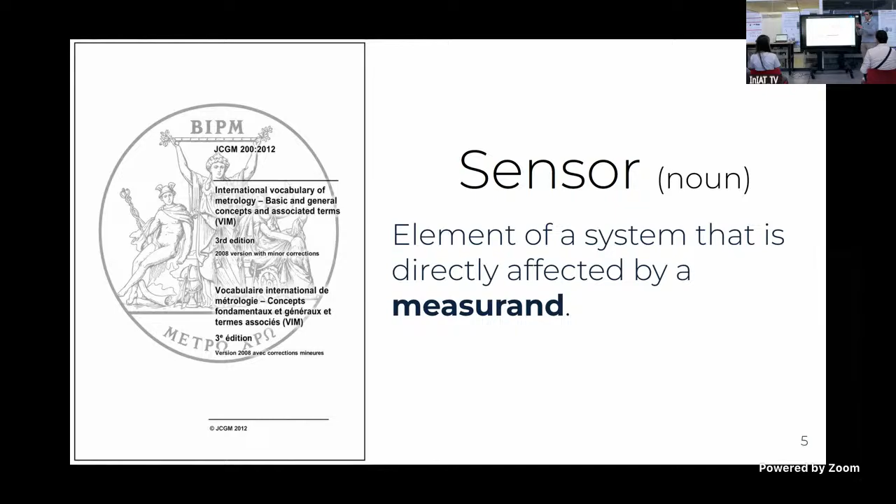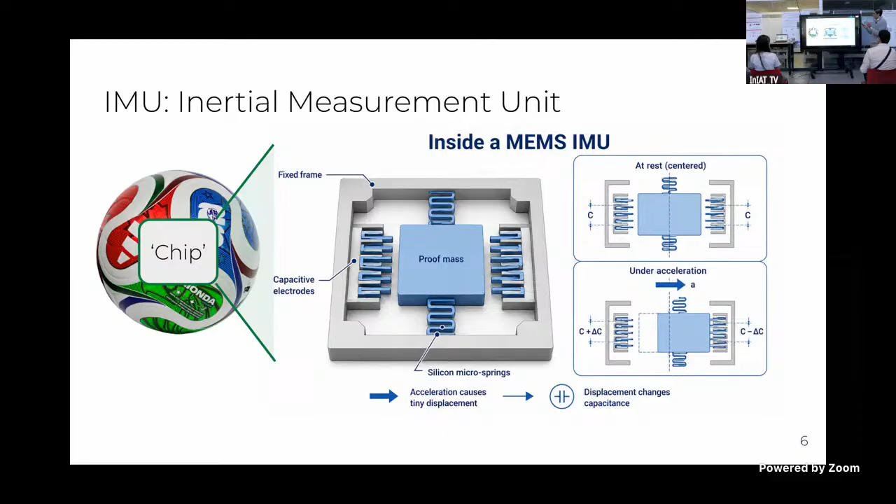In this case, the chip or CPU that the sources say the ball has is actually an IMU. I'm pretty sure people here at InIAT are experts in IMUs. This specific type, the micro-electromechanical system IMU, consists of a fixed frame with a movable proof mass in the middle. As the mass moves to one of the sides or walls of the frame, the capacitance increases or decreases, and from this change in capacitance, we can get acceleration. This is only 3 degrees of freedom of the IMU that account for linear acceleration. We know the IMU actually has 9 degrees of freedom, but for this example we only need these 3.

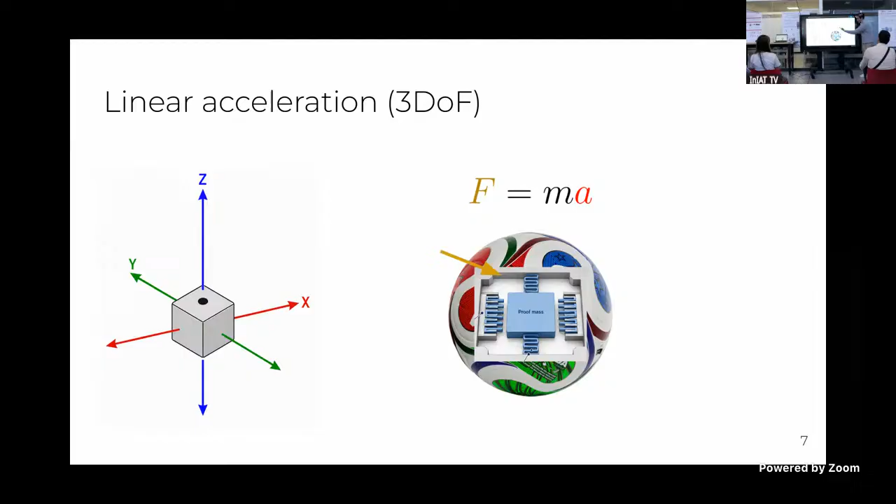The working principle, really the basics, is Newton's second law, which says force equals mass times acceleration. Given that any pressure or force applied to the ball comes with acceleration, we can get the force applied to it, no matter where we applied it. This presentation is not actually about football, it was just to get us started.

The next thing I'll discuss is sensors beyond the soccer field. Specifically, we want to discuss sensors that allow us to get information between the stump or residual limb and the socket, the cup that the leg prosthesis comes with. Then I'll share a timeline from very archaic but yet resourceful methods to get pressure back in the day, to e-textiles, which is one of the leading fields in sensing for pressure. Later on, we'll talk about the e-textiles we've developed at the Wearable Robotics Laboratory.

I'll guide you through what can go wrong because there's no perfect sensor. And I have some bonus for you guys.

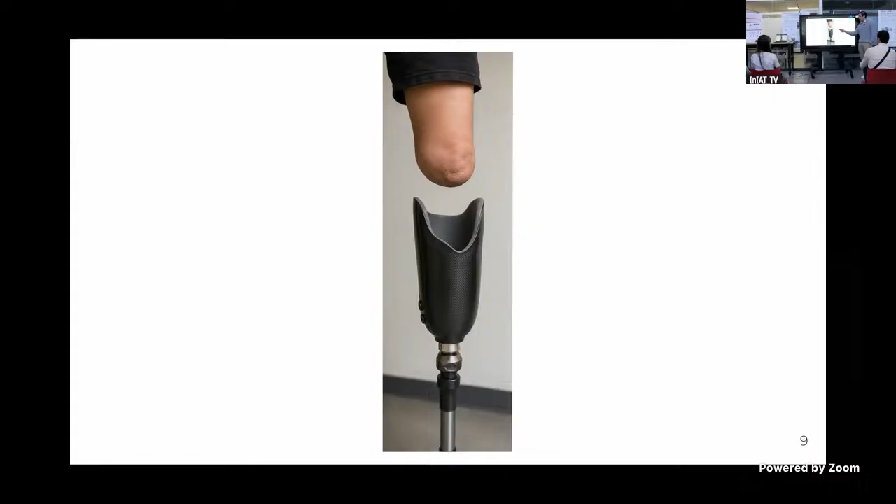To get soccer outside of this presentation, sensors allow us to get hidden information because you can't really tell when a player is touching the ball at a specific time frame. So in my research, sensors help us to see hidden information on the subject.

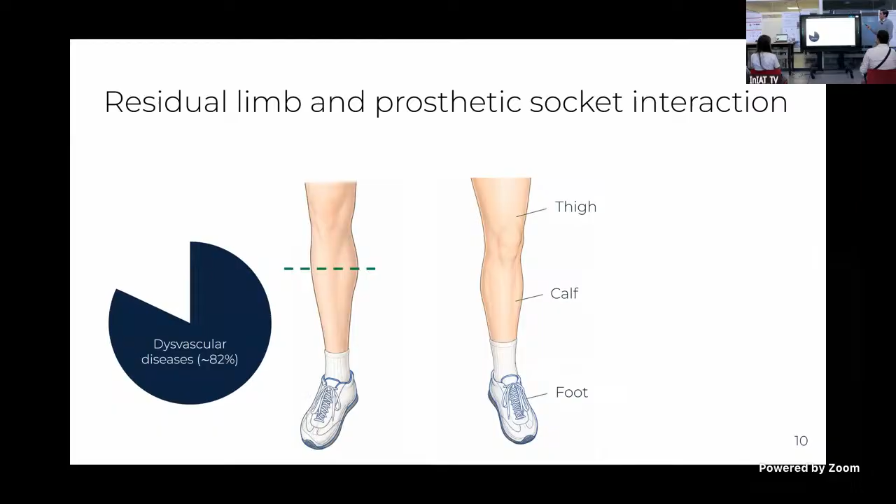Just to give you some context, why would someone get an amputation? There's a couple of reasons that encompass the scenario. The number one reason why someone would get their limbs amputated is diabetes or dysvascular disease. This starts with the accumulation of fat on our veins, and that makes blood flow difficult, not allowing blood to travel to your extremities, which is problematic. You would eventually get one of your limbs amputated for this reason. This accounts for around 82% of the cases.

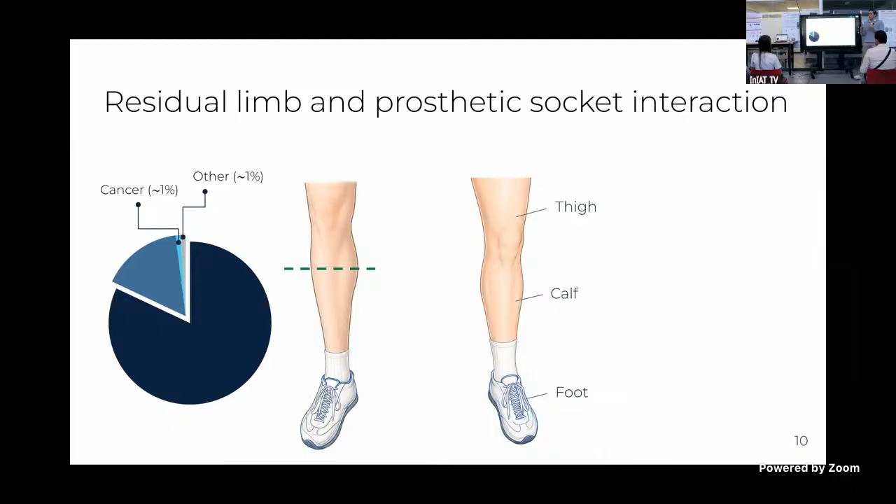Then we have trauma, and that means it could be an accident, or over the war, a bomb. Then the not so common causes, but causes for amputation are cancer, accounting for 1%, and other, accounting for also 1%. So once a subject has an amputation, they are usually prescribed a prosthesis to regain support, so that they can become independent again.

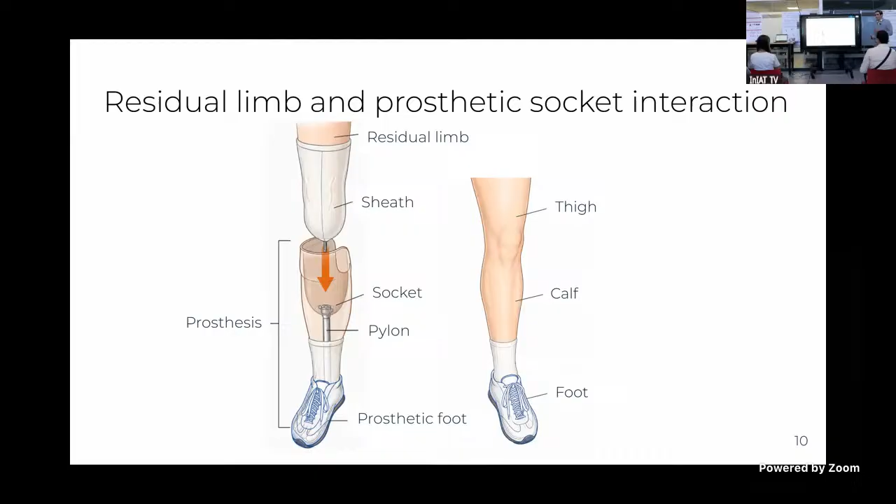A common prosthesis is formed by the socket, which is what is in contact with the residual limb, the pylon connecting the socket and the prosthetic foot. There are other types, more fancy, that include actuators and whatnot, but this is enough for what we need for this presentation.

Now, the issue comes with the fact that the residual limb is not constant in its volume, and through changes in volume, we can also get problems in the interface because the socket remains its shape and volume fixed.

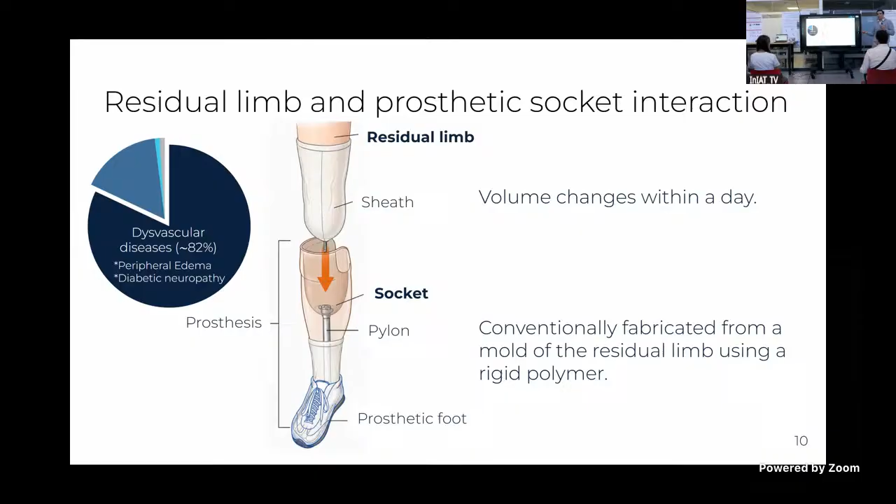And just so that we remember, 82% of cases are due to diabetes, and diabetes comes with edema, which means growth and shrink of volume, and also diabetic neuropathy, meaning that the user loses sensation. If someone is not able to tell when it's comfortable or not, they can't really communicate to their prosthetist or the specialist. And that's why we need sensors in this field. As the saying goes, you can't manage what you don't measure.

So I know for a fact that some people know German here. The first paper that I found on this topic is 'Die Messung der Druckverteilung im Schaft von Prothesen,' or in regular English, why bother? Measuring the pressure distribution in the socket of prosthesis, as simple as that. Back to 1954.

Researchers thought on, well, first of all, in this year, people still wore wooden prosthesis, meaning prosthesis made out of wood. So this was actually innovative. They drilled 100 holes around the prosthetic socket, and then connected a tube that would apply a known pressure, which they would measure using two manometers: one to control big changes in pressure, and a more fine manometer that would control small changes.

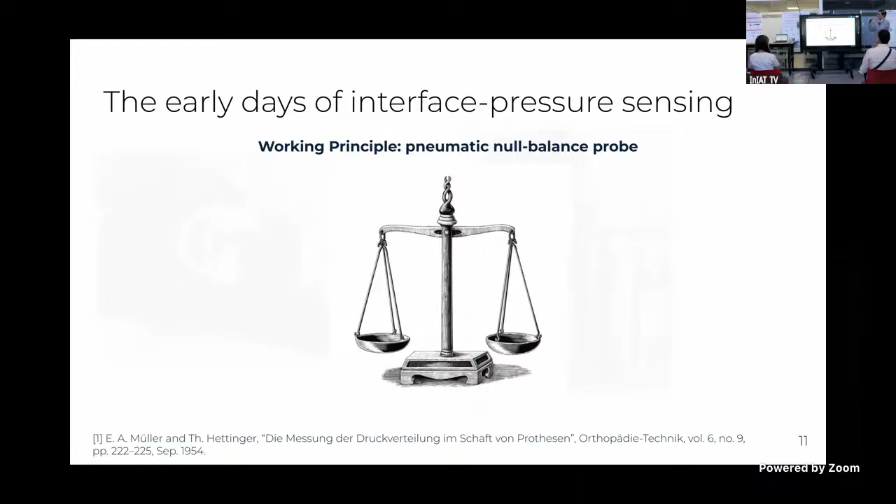Their idea behind this was that if you have one of the null-balance probes and you want to figure out the mass of an object, you could place that object on one side and then place a known mass on the other side. If they reach equilibrium or balance, then that value is the value of the mass of the first object.

Going back to pressure, this means that if you're applying some known pressure on one of the holes and suddenly the limb lifts—which obviously is not going to happen because they weren't accounting for the anisotropic behavior of skin, meaning that if you apply pressure in one direction, it deforms in one direction, but completely differently in a different direction—so the limb was never going to lift, but that's what they thought would happen.

When the pressure applied was less than the pressure felt at the interface between the residual limb and the socket, the limb would remain seated, but when they were kind of similar, the limb would lift a bit.

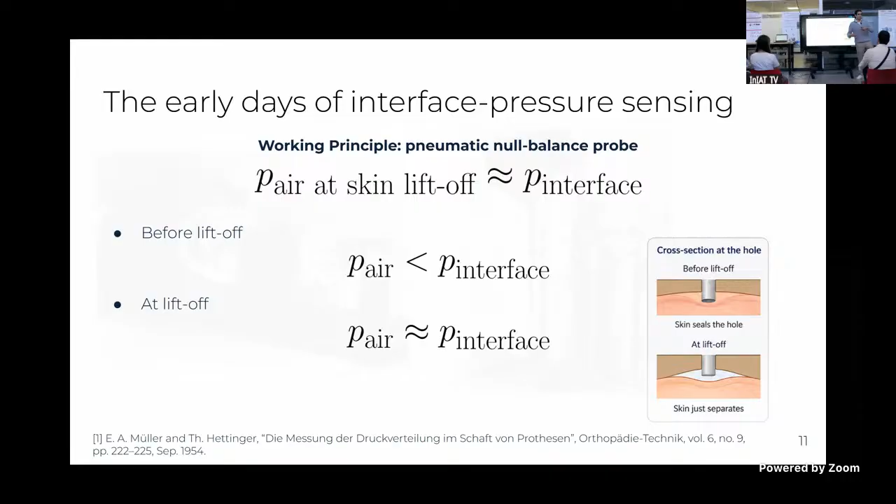Yet they found some really meaningful contributions to the field. For example, it's very different to have continuous pressures for a long time as opposed to intermittent pressures. You can also increase the pressure a lot if it's only for a small period of time. However, too much could be harmful for

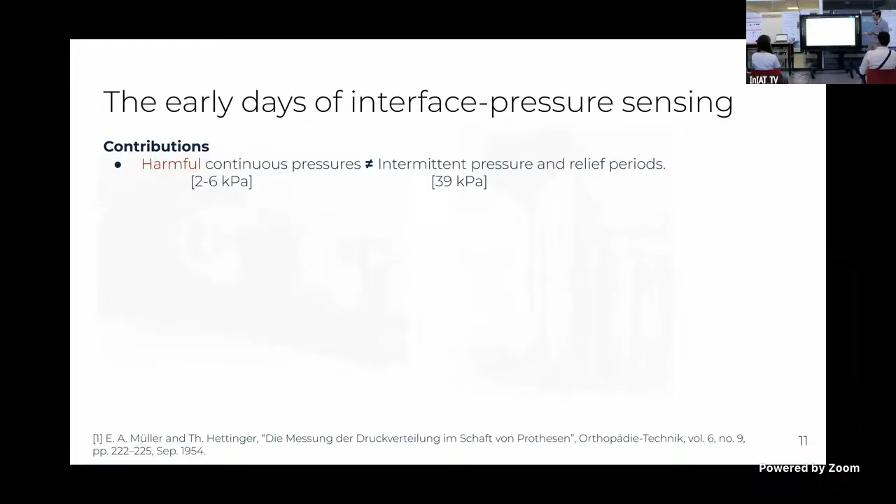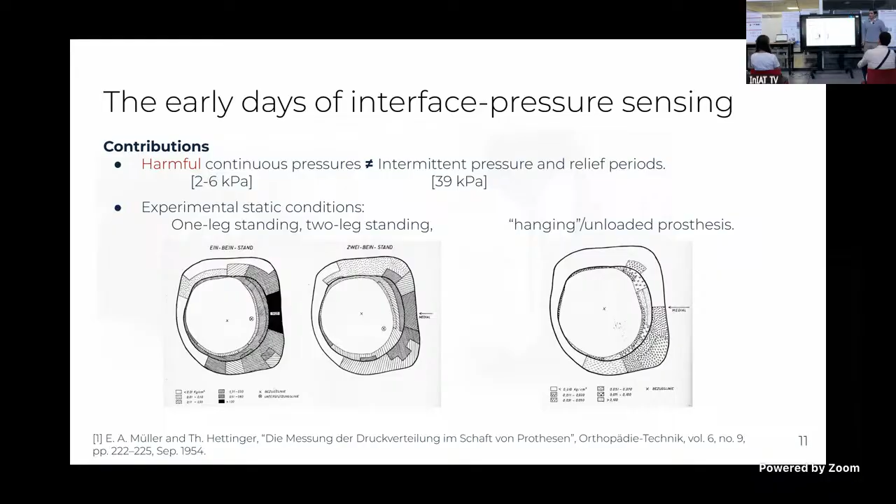a residual limb. Also, although this was not numerically accurate, the values here were not accurate, they knew that the pressure was different if the person was standing on one leg, the prosthetic leg, or if they were standing on two legs, or if they were lifting their body with bars. So that's also meaningful.

However, the main limitations were that these experiments took almost an hour or more because of all of the changes. They only had 2 probes again, and they needed to change those along all of the 100 holes. And there was the lift-off error, as I mentioned earlier.

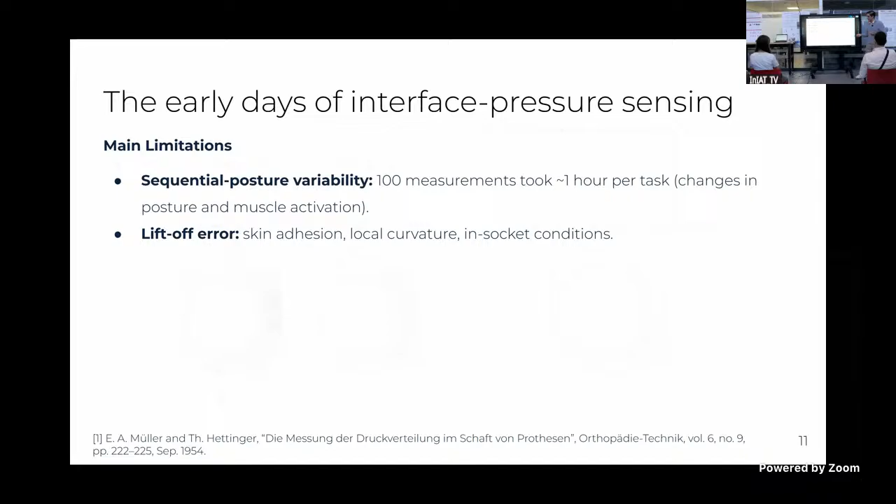Pardon me again for the language. What this table means is that they're comparing standing on one leg versus standing on 2 legs. They first measured the mass of the subject, that's here, and then they try to estimate the mass of the subject by adding up the pressures of all of the 100 holes. And the difference was considerable or not, depends on your opinion. I believe it was a good result in the end of the day, given the year when it was executed.

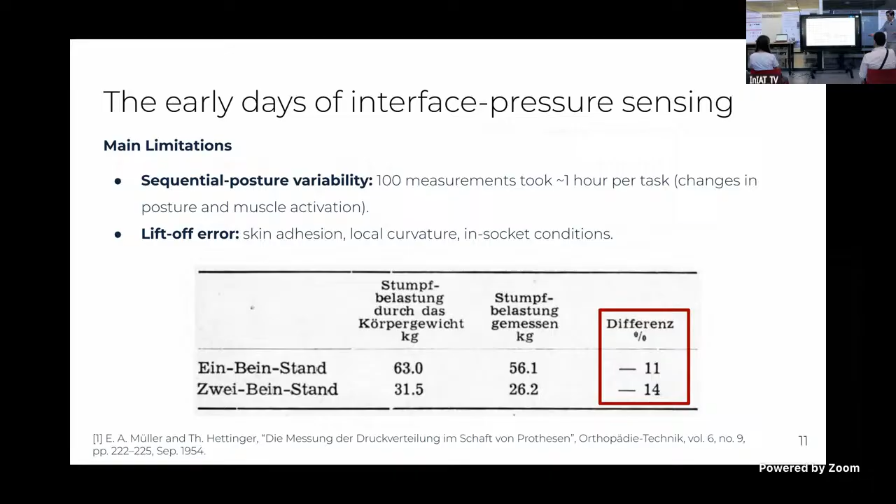As time progressed, people discovered transducers, and again, pardon my language, but we need to make a pause. A transducer is usually called a sensor as well, but the difference is that the transducer, if we're specific and we go back to the terms, is only the element that changes energy from one source to a different type of energy. Sometimes sensors do that, that's why people name them interchangeably.

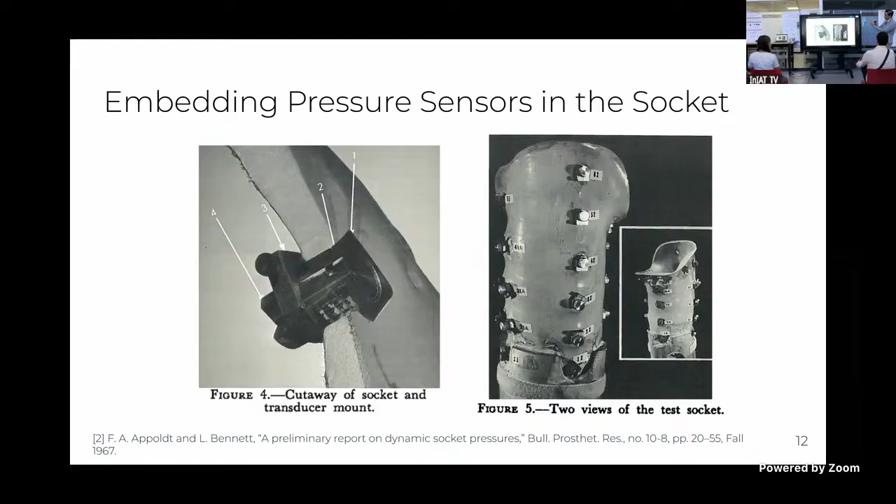So this transducer was pretty much a piezoelectric material. If you have all of those elements and you press them together, that's how you get the transducer that Appoldt used in his study. It was a bit less than 100 holes, but here the transducer was already mounted, so they didn't need to change the probe from one hole to a different hole. Also, this is more accurate than only applying air and expecting that the interface pressure is going to be the same.

So cleaning up this diagram, the strain gauge is only on this side of the transducer. The working principle is that if you deform the strain gauge however you want, that's going to create a change in resistance, which then through different arrays in electronics, you could actually get a change in voltage. And that change is what you translate to pressure in the end of the day. If it's normal, which is what they did, you only get pressure in one direction, which is good, but it's not enough. And that's why later on,

Joan Sanders from the University of Washington—you can note by the date that this was 25 years of difference between the first experiment and this experiment—well, they assembled this other array of strain gauges that allowed them to also get tangential pressure. So if you're applying pressure in this direction, the strain gauge is going to deform in this direction as well. And that's how you come back to that piece of information, which is really meaningful because,

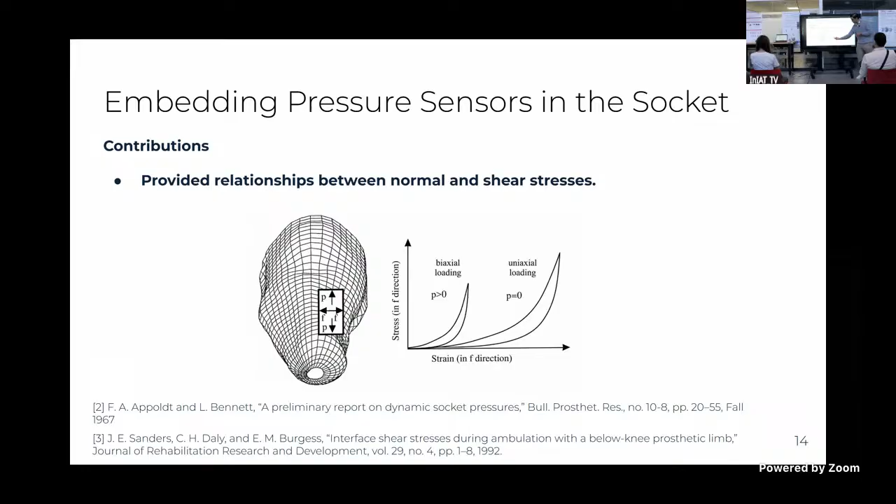Pretty much, maybe I should start by explaining what strain is. Strain is the change of length of a material. So you expect changes of length if you're applying pressure on your skin. So by a minimum change of length in skin, you get higher peaks of stress if you have shear and pressure. However, if you only have normal pressure applied, you can withstand more stress.

Then the limitations of this work are that they needed to fabricate new sockets for each participant, and that's something we're trying to tackle with the e-textiles. They were heavy and bulky, adding up to 2 kilograms per socket.

And they needed to be perfectly flush. In the first experiment by Appoldt, they mentioned that this would take half of one day to make sure that all of the sensors were flushed.

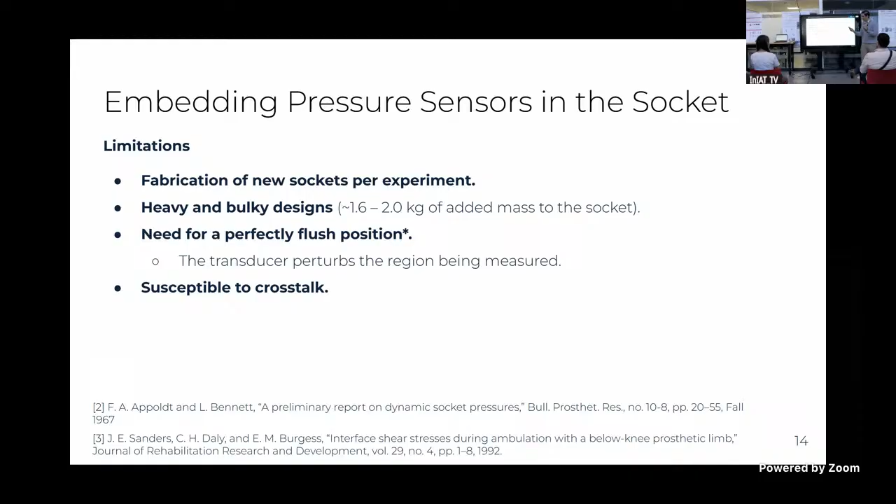Given that the transducer is something solid, even though you're trying to measure the pressure of this area, and you're not controlling how perfect its position is, it could create some pressure already. So in short, you're not completely sure if the pressure you're reading is accurate because this is already perturbing the environment. And they're susceptible to crosstalk.

Today we have commercially available sensors like the FlexiForce that's based on a resistive working principle. We also have another company, this product called the F-socket, and the company is Tekscan. So different shapes, different colors, different companies. They're not perfect though. We'll see that in a bit.

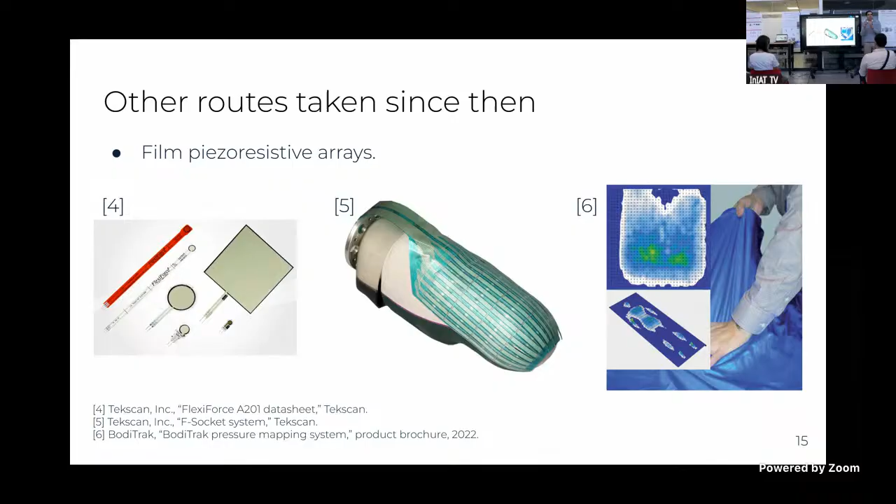Other than resistive, there are also capacitive sensors, and they also give you the color map. This is the color map. Pretty much you only get colors on an array. You're not sure of what's the particular value of pressure.

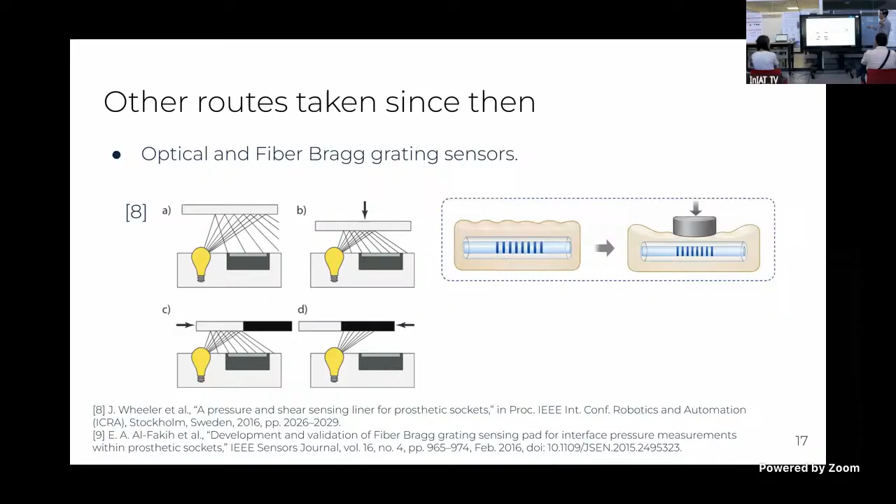So again, resistive, capacitive, and people went wild here because nowadays you can even measure pressure using a transistor that changes the reflection of light, measuring the reflection of light as the socket comes near the sensor. So in short, we have optical sensors as well, and another kind called fiber Bragg grating sensors. We're not actually covering those.

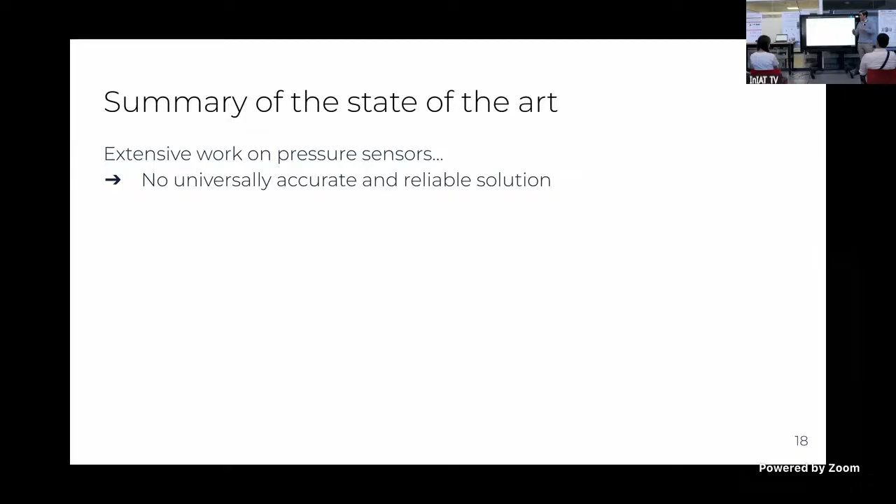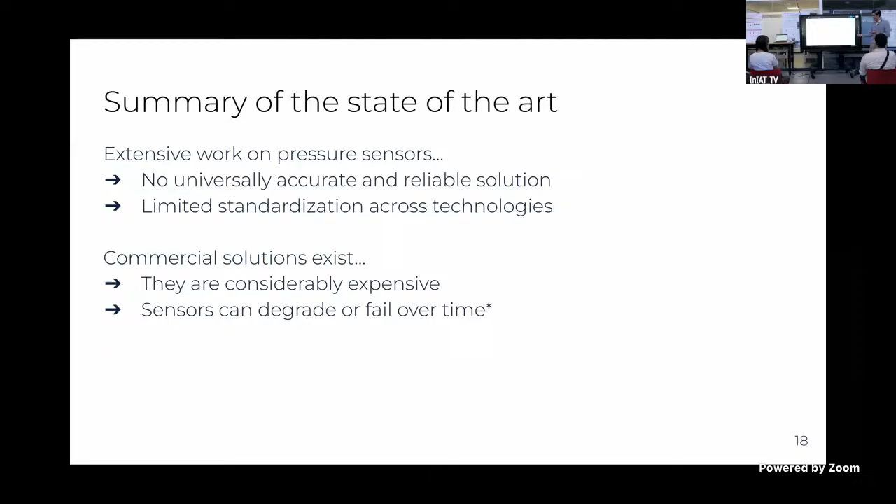I'm just showing you all of the options. The summary out of this state-of-the-art exercise is that, yes, there's extensive work on pressure sensors, but there's no best of the best sensor yet. And they're limited in standardization because every researcher comes with a new technique to measure pressure. There are off-the-shelf options you could buy, but they're very expensive, and you don't always get the warranty you'd like. And that's sad.

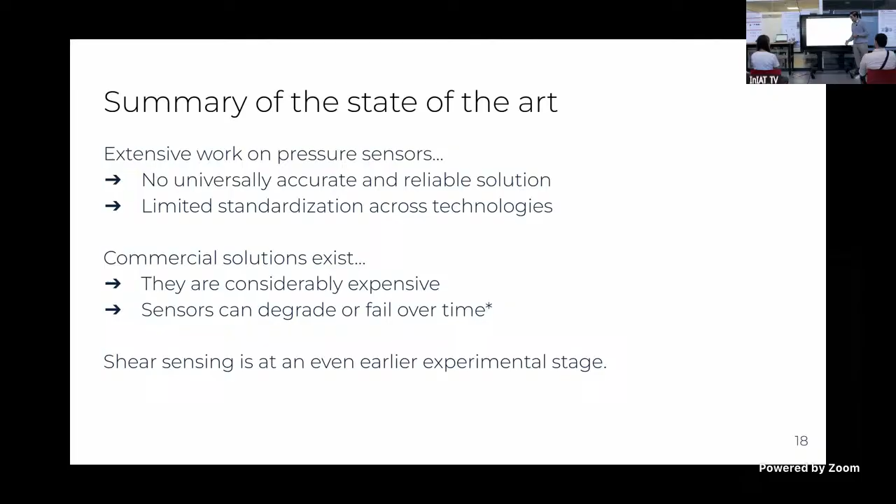And finally, again, you need to measure shear, but shear is really at an early stage compared to normal pressure sensing. If there's no standardization in normal pressure, of course there's not standardization over here.

Now moving on to custom e-textiles, but first I want to answer the question, why custom? Again, there's not a best of the best. That's not something we're sure will guarantee our experiments. So we need to find ways to measure pressure with materials that we can get at a lab.

And what does the field need before we start assembling parts and designing something? We need minimal modifications to the interface so as to not make the whole setup bulky and heavy. We need it to be comfortable enough so the participant can continue with their day and do as many activities as they're used to. We need to reduce wiring because that could be a hazard for the participant if they're walking through a narrow area. We also need to customize the whole setup to individual patients.

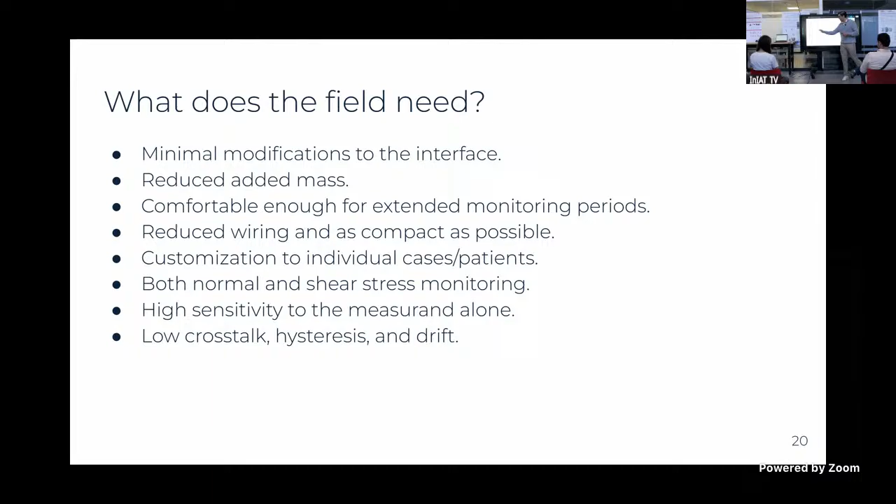Sensitivity is also important because if you don't have enough sensitivity, there's a wide range of pressure your sensor isn't going to measure. And again, I mentioned crosstalk a couple of slides ago. Right now, we're about to define what crosstalk, hysteresis, and drift are.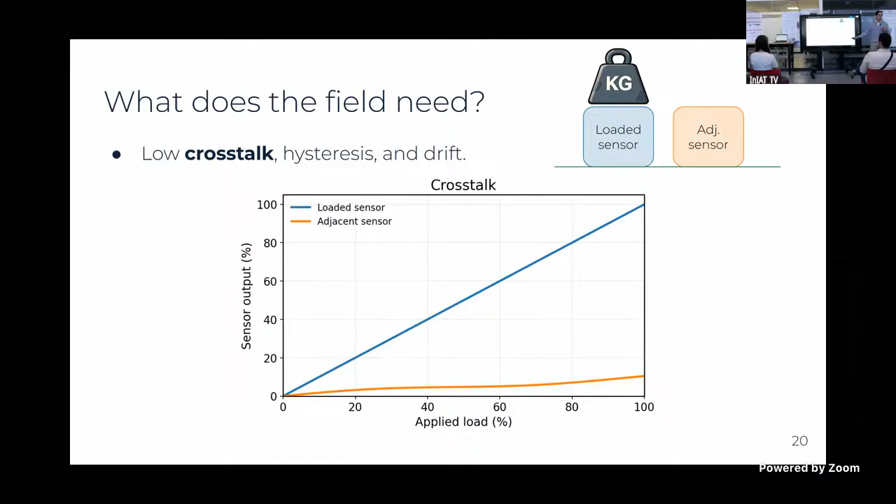Imagine you have two sensors, and you're applying a load to one of them. The other one is not touching the first one, it's only adjacent. But yet, if you look at the data, sometimes you can see the adjacent sensor actually showing you a measurement. And that's garbage. You don't need that.

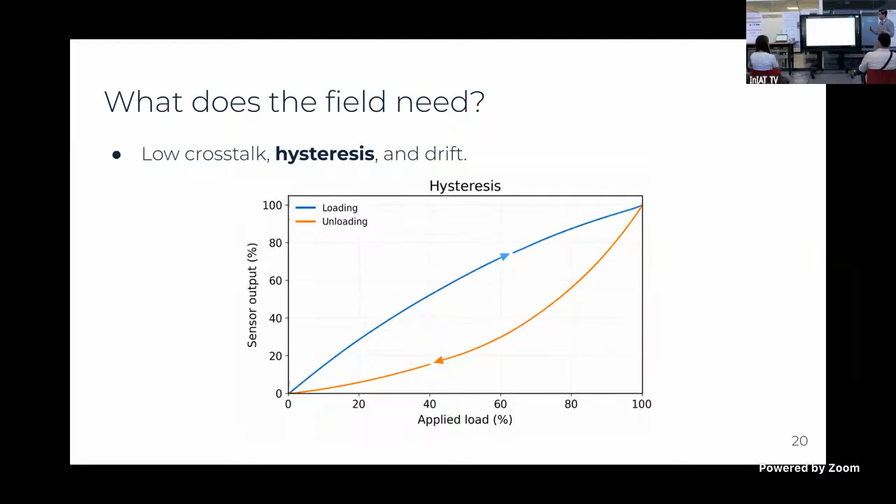Hysteresis is another phenomenon where, after applying a load, you're not actually coming back to the path that the sensor is measuring. Ideally, if you're applying a load and then removing it, you should go back through this line. But this happens a lot. And as an extra note, hysteresis is also an effect of skin.

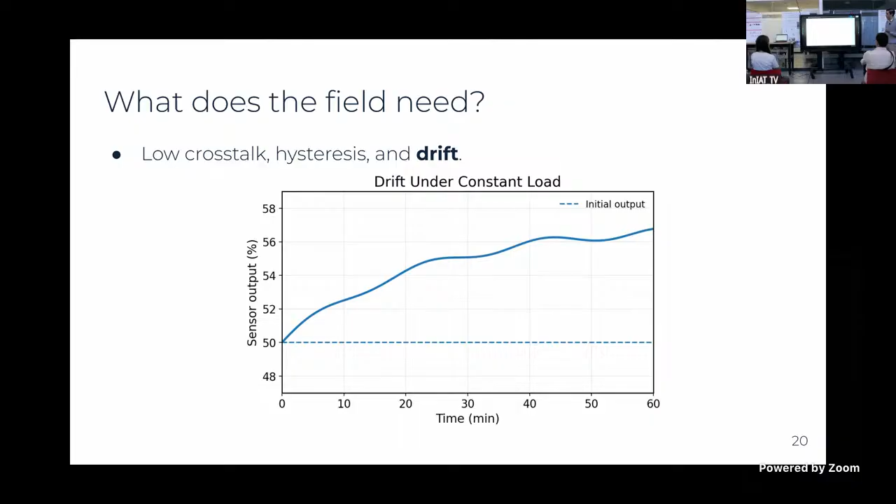And drift, which means that there are many variables, and you're only interested in measuring one, in this case, pressure. If you're trying to measure a constant value, sometimes the sensor can drift in time, meaning the measure would increase or decrease unexpectedly. That's due to factors like temperature and others. Also, the age of the sensor matters.

First, I'm going to show you two versions. If we were to go back in time, I didn't know there was going to be a version 2. I was hoping this was going to be the best of the best, but it's not.

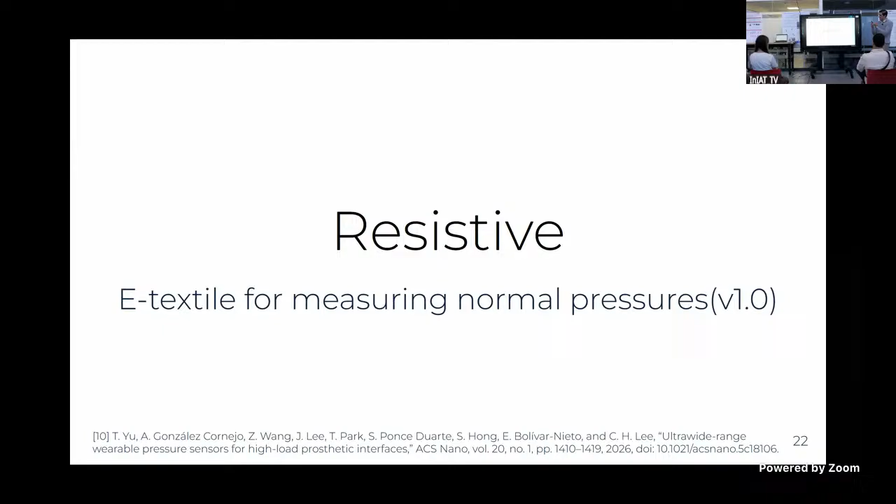So, resistive: we're measuring changes in resistance. We need a material that is deformable, so that if you apply pressure, that deformation translates to pressure. But if you remove the load, the material goes back to its original shape. So we thought of foam, specifically polyurethane foam.

Now, this field is completely unknown to me. I'm trying to explain to you something I don't completely master. This is work of my collaborator, Tian Hao, because he's an expert in materials. So we grab this piece of foam and we dip it in polydiallyl dimethylammonium chloride. This is the hardest part of the presentation.

It will gain positive... it will gain protons. That's what I'm trying to say. It will get positively charged. And then after this, if you submerge it into a solution that has multi-walled carbon nanotubes, given that the material is positively charged and the nanotubes are negatively charged, they're going to adhere harder than superglue.

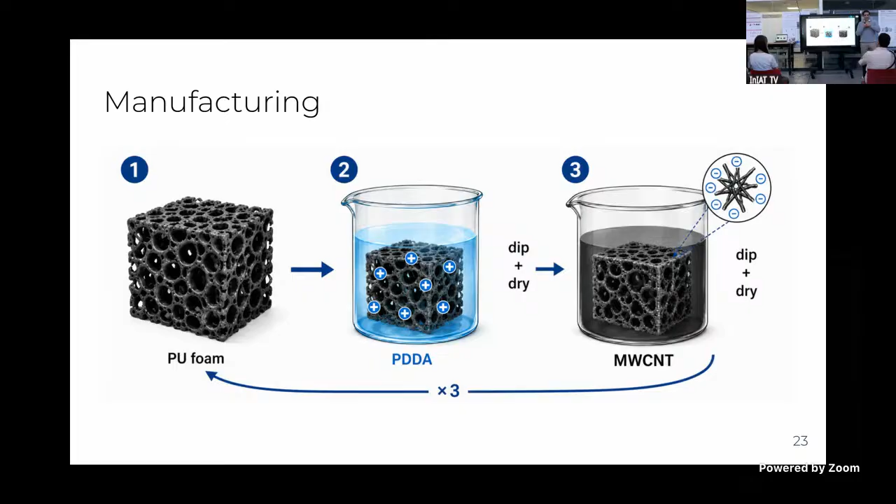And if you repeat this process over and over again, this creates a change, a variable resistance. Because if you connect it to a constant source of current and then to ground, you'll be able to detect changes in resistance, and those changes in resistance is what we use to get pressure.

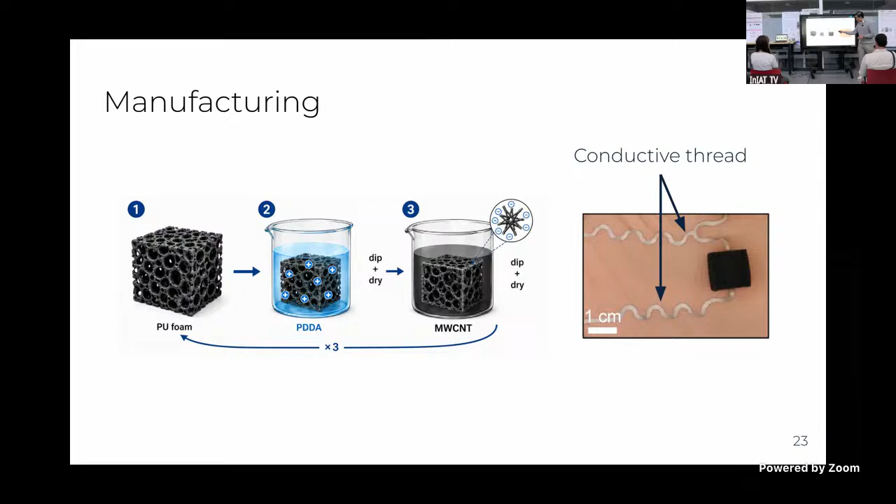A minor caveat is that this sensor only measures normal pressure. And well, this is the sensor itself. Everything else is just to connect the terminals to voltage, or again, constant current and ground.

Just to visualize the working principle better, imagine you have this simple circuit and you're applying some current. The electrons are going to travel always through the path that has less resistance. But now if you have this material and you're compressing it, it's like you're getting rid of some of the resistance in the chain. Hence, the electrons are going to travel via a path that doesn't have resistance anymore.

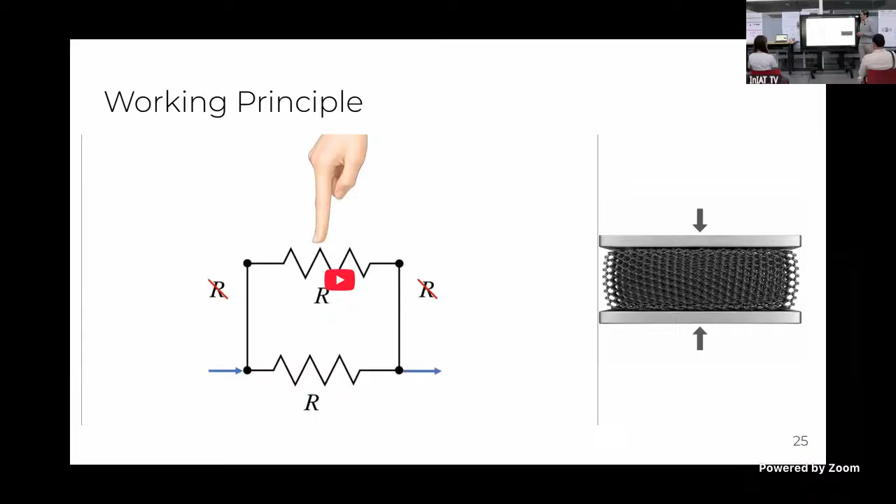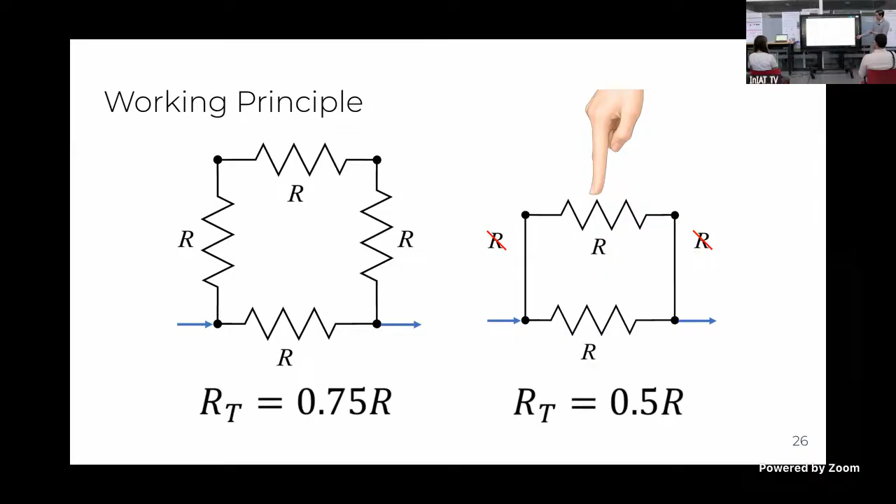So that's what I mean: if you apply pressure, resistance is going to decrease. Through a connection to pressure via linear regression, we can get the values of pressure that we want. In this simplistic example, this is a value of total resistance, so you can check that resistance is actually decreasing.

In order to test it with humans, we had to do tests over and over again. In this machine, we had a phantom limb, a limb made out of silicone, and this is an Instron machine. It's applying pressure over and over again, and we measure the response of the sensor, and it was good.

As some highlights, the measurable range of this sensor goes from 70 pascals to 4 megapascals, so that's beyond the range that we have interest in. Of course, there's some minor range that we're not covering because of the 70 pascals here, but it's not considerable. I think we can get good conclusions out of this.

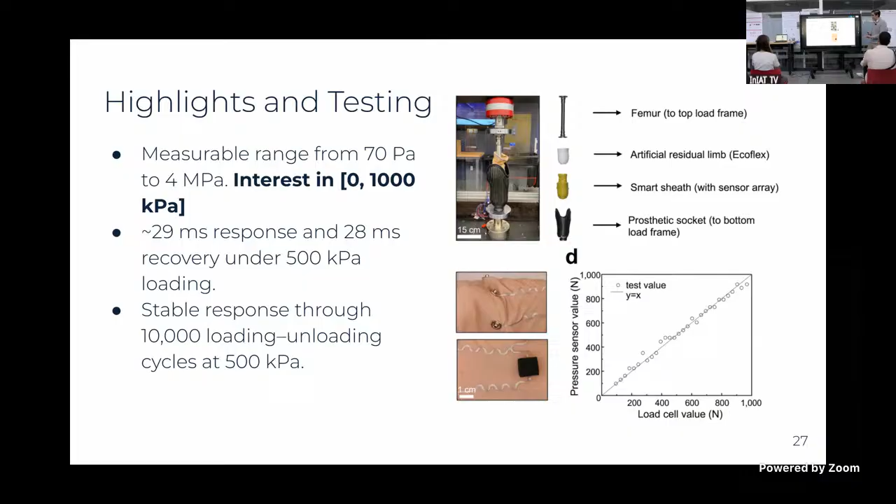This is also important because you want your sensor to react instantly to the load being applied. We have a minor caveat here because it takes up to 29 milliseconds—still fast though. And it's stable, because in this test we applied a cycle of 10,000 loading and unloading sets, and the response was increasing and decreasing, increasing and decreasing, over and over again.

We tested with humans, and we got pressure where we were supposed to get pressure. But that's not it, because again, this only measures the normal pressure.

There's some spatial uncertainty because the sensors are embedded in a textile, and the textile moves relative to the residual limb. Being sure that the position of the sensor is set and won't change matters a lot. For example, if you put a cape around the residual limb and then put it inside the socket, even if you've collocated the sensor, given friction and other relative motion, the sensor could go up or to the side, and then your conclusions won't be accurate.

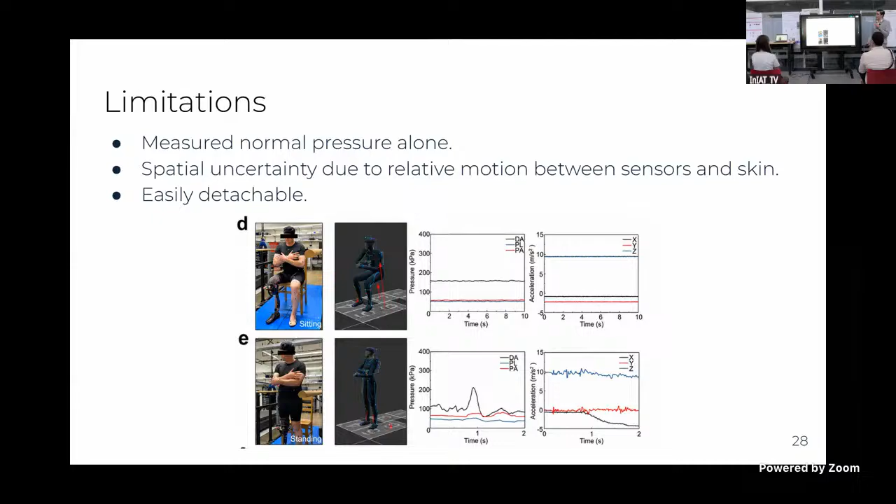It's easily detachable. First, we started this experiment with 5 sensors. After the experiment, we found out that 2 of the sensors fell off because of friction. This is how the sensor looks — it's foam and some type of stack. What we used to stick it to the textile was glue, so that's the reason it's easily detachable. However, we didn't iterate on this design because having shear is way more important than fixing those later details.

So we came up with version 2, which is capacitive. In this sensor, we used embroidery. We sewed silver-plated cable through the textile, and we came up with a top electrode and 4 bottom electrodes.

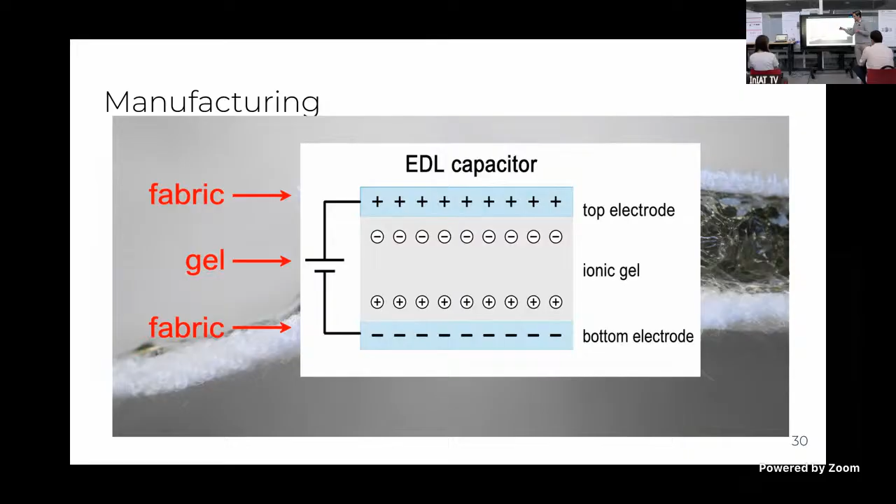Once you have your dielectric material, all that's left is to smash it in a sandwich — fabric, gel, fabric — and that's how you get the sensor. This is pretty much a capacitor again. One side of the textile is grounded, meaning it's connected to ground, and the other is connected to a signal. So now we have a variable capacitor, because according to this formula — permittivity, area of the surface, and distance between the two plates — if you smash it, the distance decreases, hence the capacitance increases in this case.

Now, if I left the presentation here, it would be kind of clear for you maybe, but that's a cop-out answer — I'm not telling you the full truth here. In order to measure these changes, which are an analog change of the material, we need an analog-to-digital converter. To be specific, that's the FDC. Just think of it as something that converts the analog measurement to a digital value.

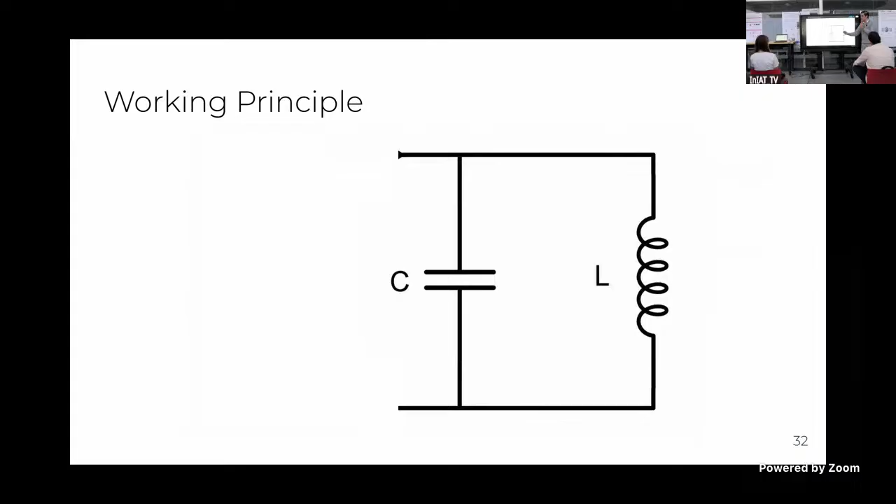What the FDC uses is an LC tank — L for inductor, C for capacitor. If the capacitor was fully charged and you connect it to the inductor, ideally energy would flow back and forth forever, but that doesn't happen because energy dissipates as heat. So it would eventually stop, but the cycles are repetitive.

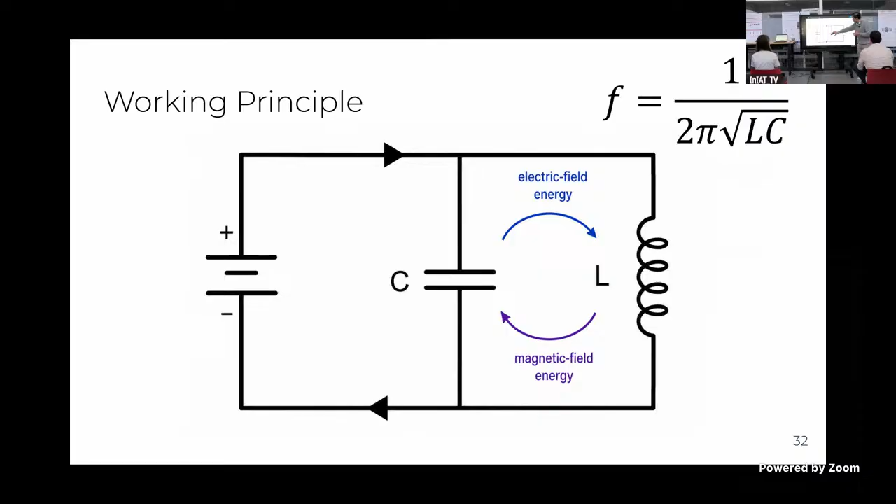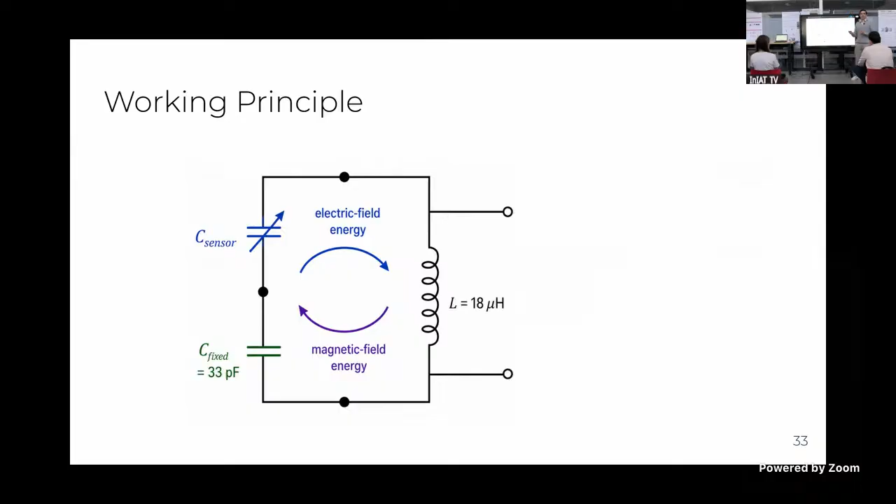So we connect it to a known energy supply, and energy starts flowing. What the FDC actually does is measure how long it takes to get energy from the capacitor to the inductor. This is fixed at this point. But if we add the sensor, which is a variable capacitor, as load is applied onto the sensor, capacitance changes, and the time it takes to get the energy from one side to the other also changes — it could be more time or less time. That's what the sensor actually measures.

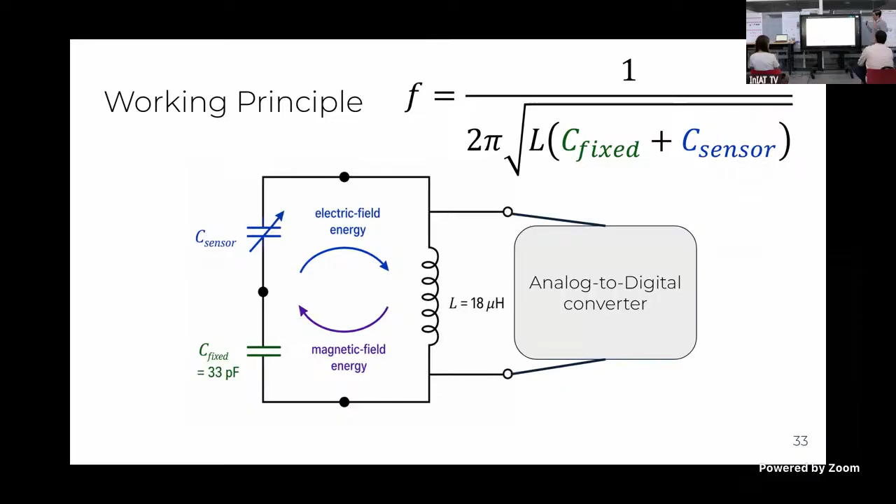With changes of frequency, we get changes of capacitance, and with those, we get changes of pressure. So far, so good, I guess. But I don't think it's fair if I were to leave the presentation here, because there are troubles. I also want to show you how these signals look like.

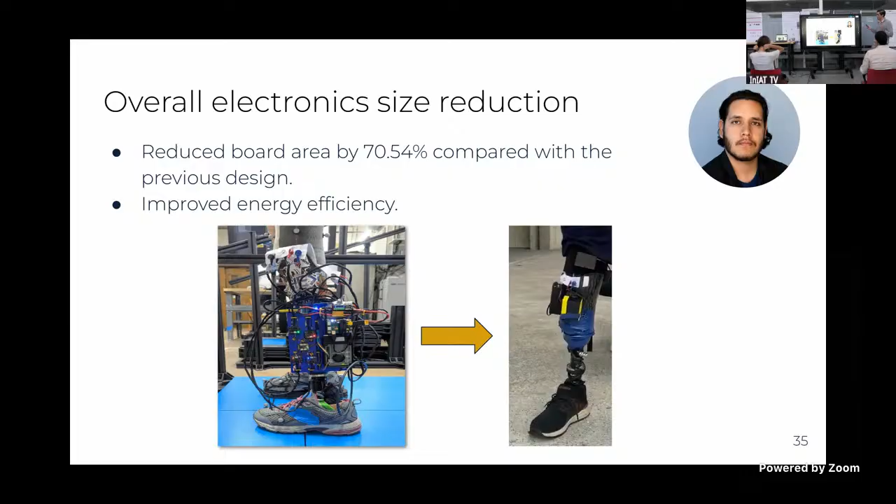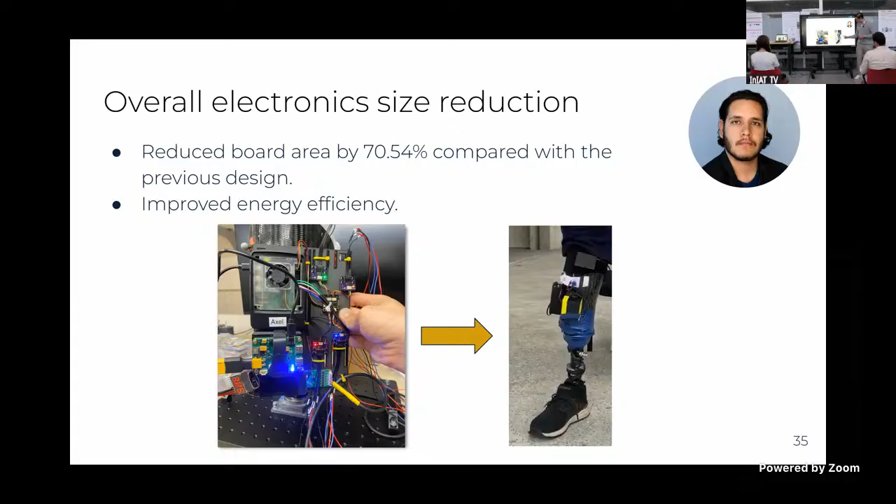I really love this picture because here it looks kind of messy, many cables. It was big and bulky, something we didn't want at the beginning, but we had to choose because we knew the sensors work and we needed to do tests. But now, after reducing the size, improving energy efficiency, and making this record pressure for a complete day, we can actually send a participant home with the setup and measure the whole day. That's a game changer, big deal. Just so you have more details, this is a close-up of the motherboard, way bigger than this, way bigger.

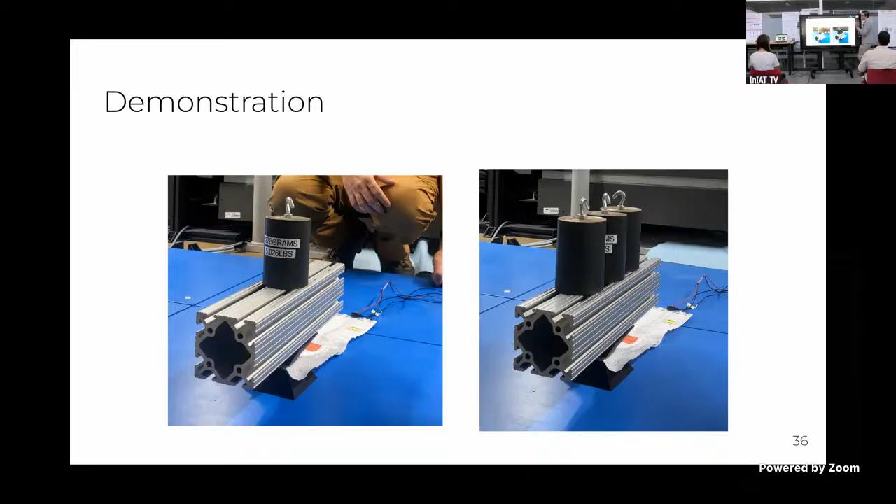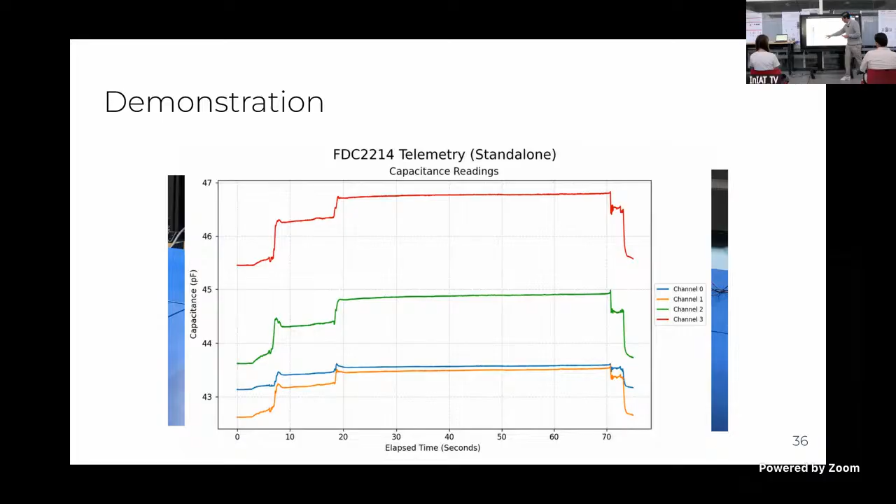Now I want to show you a demonstration of applying load to the sensor and then measuring it. In this test, I applied first this aluminum bar with this weight. The value doesn't matter at this point. I just want you to have in mind, first we applied a known load, and then we increased the load applied. That's how it looks, the changes in capacitance. You have a baseline for each sensor. This is only one sensor, but we have 4 channels. In this experiment, we were only applying normal load. That's why all of the channels are increasing and then settling and then increasing again to the maximum amount of load applied.

Then we also tested this sensor with human participants. We placed 3 sensors. These are only labels so that we can identify them. Each of the sensors has a coordinate frame attached to it, because remember, you need to know where the sensor is in space so that the measurement makes sense.

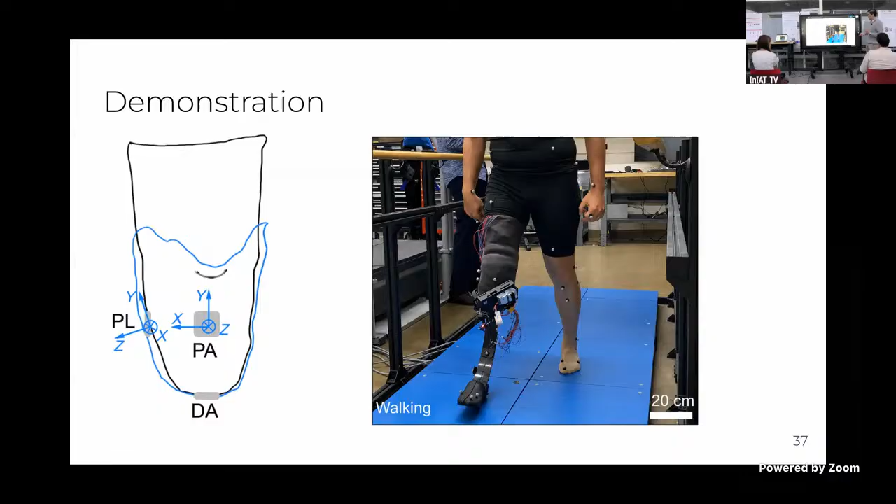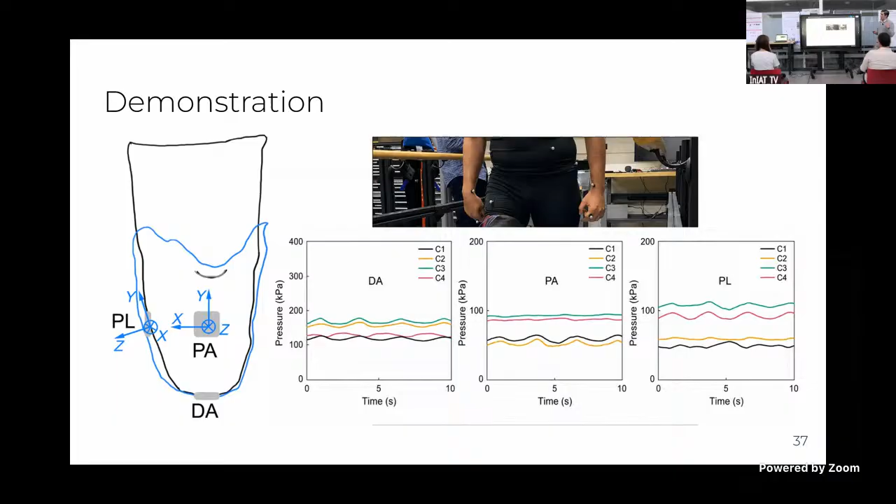And this is how values of pressure now look like. We translated capacitance to pressure by fitting either a line. This is what my collaborator did on this paper. What I usually like to do is just calibrate the sensors before the experiment, see how the response is. If I see that the response and the load applied are both increasing linearly, then I would fit a line. But if not, I would fit a polynomial or a quadratic equation to it in order to get pressure.

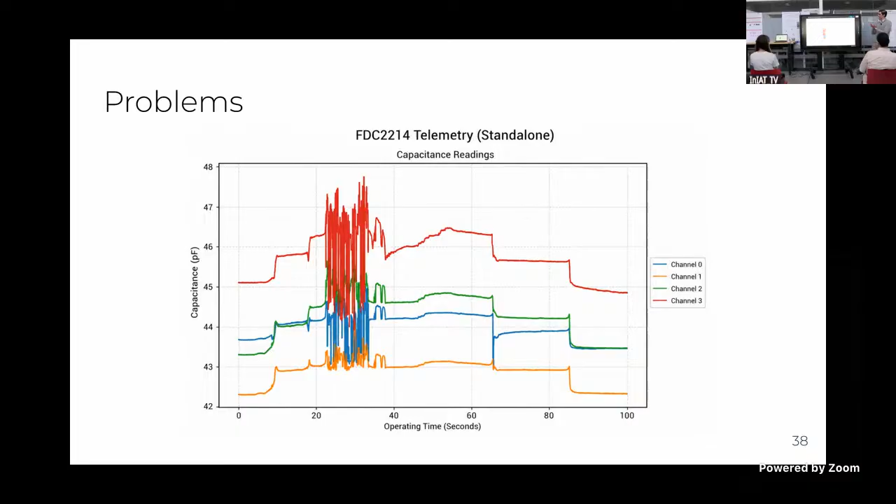I forgot to tell you, but you can transmit capacitance with your fingers. That's why you can touch your mobile screens or your Apple Watch or whatnot, or the screen, for example. But anyways, this is pretty much the end of it.

I want to thank all of my collaborators. This is Tian Hao, he's defending his PhD today, so it's a beautiful day. This is Professor Shiwon Lee, he's Tian Hao's advisor, and they were designing the sensors, knowing what material to mix with what other material in order to get the responses we wanted.

These amazing people we've been working with are prosthetists, and whenever we perform an experiment in south of Indiana, we would reach out to these really amazing people. Also again, Juan, the student who helped us bring the electronics smaller and make them more energy efficient. We've been collaborating with Dr. Adriana and Dr. Alma, real amazing people to work with. For the last couple of weeks, we've been recruiting people, executing the experiment I told you about to send the participant with the setup home and record data for the whole day.